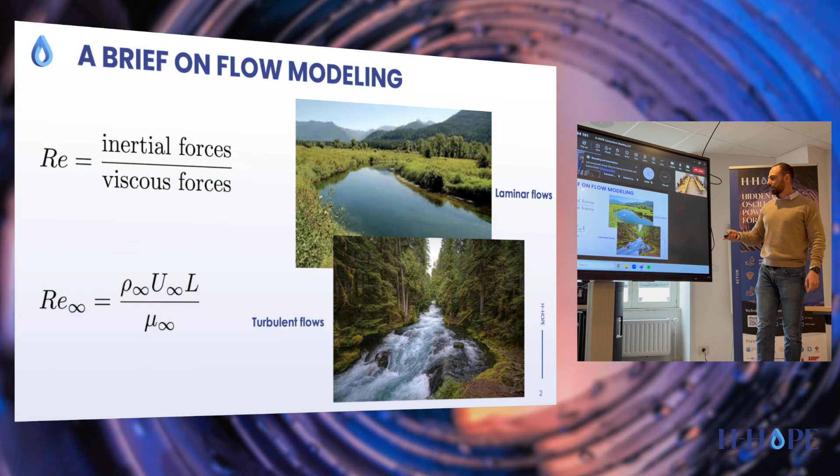So what characterizes laminar flow? Laminar flows are characterized by the symmetry of their fields. If we look at the fluid mechanics around a circular cylinder, an application very close to the intention of our topic, we see that a laminar flow is completely symmetric.

If you look at the value of the Reynolds number, we have very low Reynolds numbers: 10, 20, 40, 70. While increasing the Reynolds number, you see the flow tends to lose its symmetric behavior. At very low Reynolds number, the flow is very smooth and very regular, but while increasing the Reynolds number, the flow starts to become chaotic.

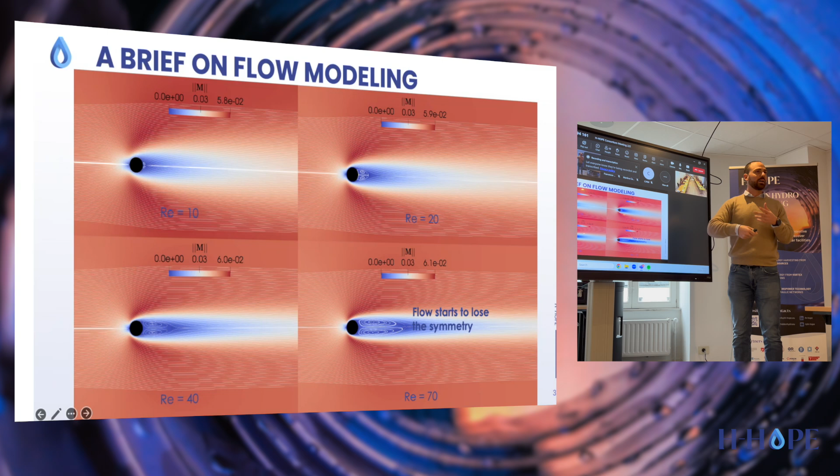That's what happens in case of high Reynolds number flows. The same cylinder, the same flow, still water for instance, but as you increase the Reynolds number, the flow behind the cylinder starts to become chaotic, full of turbulent structures, especially increasing the value of Reynolds number up to values consistent with applications in engineering.

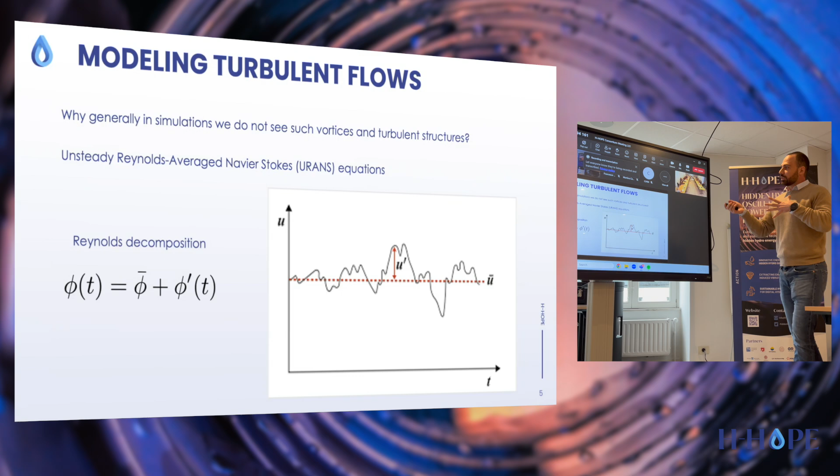But the problem is, why in simulation you don't usually see such complex behaviors or such complex vortices and turbulent structures inside the flow? If you look at the simulations me and Giovanna performed during the first part of the project, all the simulations look very smooth, the flow looks very regular, and there are no structures like this one. So it seems why you are not replicating such complex dynamics.

The reason is that replicating a dynamic like this is extremely complex because all such structures, all these vortices, could be even micrometrical in size. So you need to have a very high resolution in terms of your numerical model in order to capture such complex dynamics.

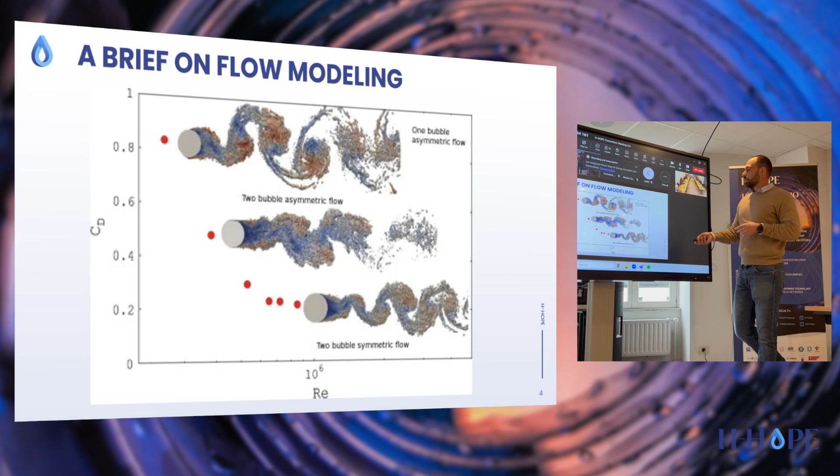So engineers have introduced what is called Reynolds decomposition. You can think that your flow is composed of an average value. For instance, the velocity of your flow is composed of an average value: you average the velocity field through time, and you get the average velocity of your flow.

The real velocity is this average value plus a fluctuation that's time dependent. But in an engineering application, you don't need to know exactly what that fluctuation is, because you are not interested in general in fluctuation values, for instance, of forces, of pressure, and so on.

You are mostly interested in the mean value related to your flow. And that's why you introduce the so-called Reynolds-Averaged Navier-Stokes problem. So instead of solving the entire dynamics of the flow, you just solve the average dynamics of the flow. That is what you are interested in, what you are looking for.

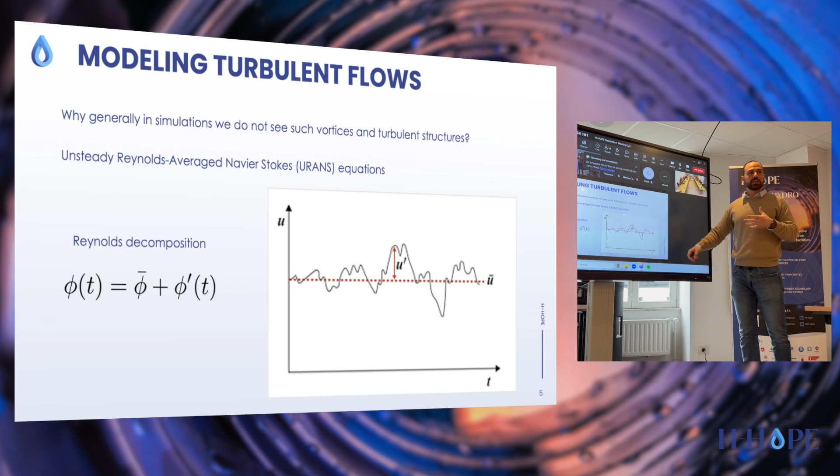I don't want to enter too much into detail, but if you apply the Reynolds-Average decomposition to the Navier-Stokes equations, which are the equations behind fluid mechanics, you obtain unknown terms called turbulent stresses. Turbulent stresses are what distinguishes the whole complex dynamics related to a flow with respect to the average field.

So instead of looking at the whole complex dynamics, you include an additional term that freezes all the complex dynamics you have and allows you to compute just the average field. But of course, turbulent stresses are unknown, and it's a very big issue to model this term.

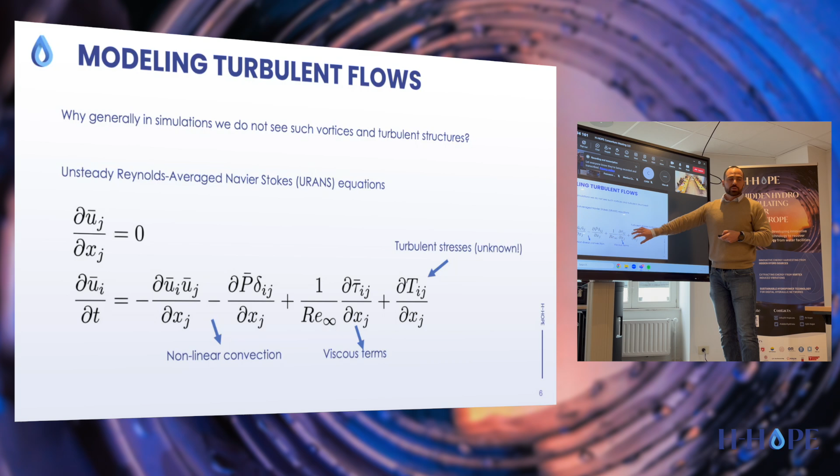And people tend to model it via a lot of hypotheses. In particular, they suppose that all the turbulent structures inside a flow are isotropic, homogeneous, and so on, introducing what is called turbulent viscosity, a parameter that must be modeled in some way.

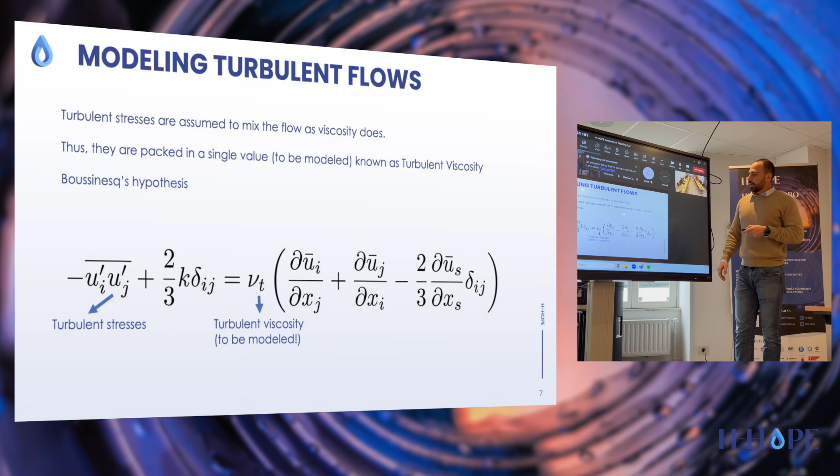And that's why models of turbulent viscosity are so complex. The hypotheses needed to reach the solution of the average dynamics of a flow are very important and very complex. That's why, from the complex dynamics you see in a real turbulent flow, you can obtain the solution of the average dynamics, which is of course affected by all such hypotheses.

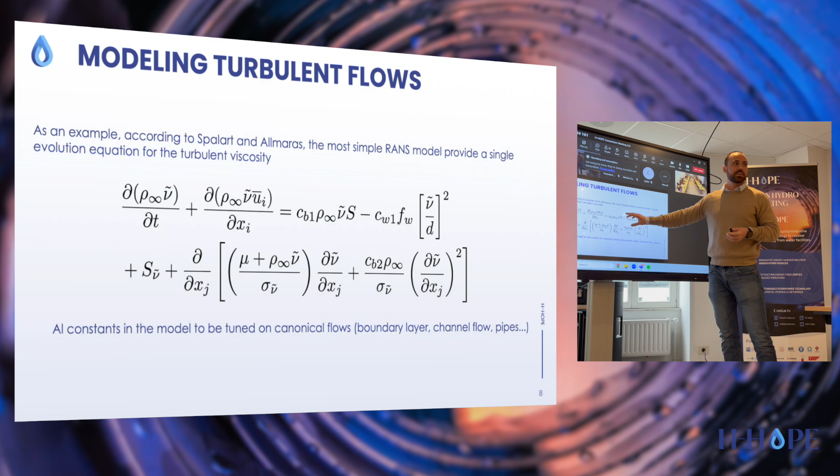Okay, what is the price of this? From an energy perspective, if we decompose the flow energy as a function of the frequency associated with each turbulent structure, we obtain a graph that looks like this.

Associated with the lower frequencies, the ones that are interesting in engineering, you have the major energy content of your flow. So for instance, in the application we have in mind, if we solve the average field, we can obtain the average energy of the flow, which is also the major content in terms of energy of that flow.

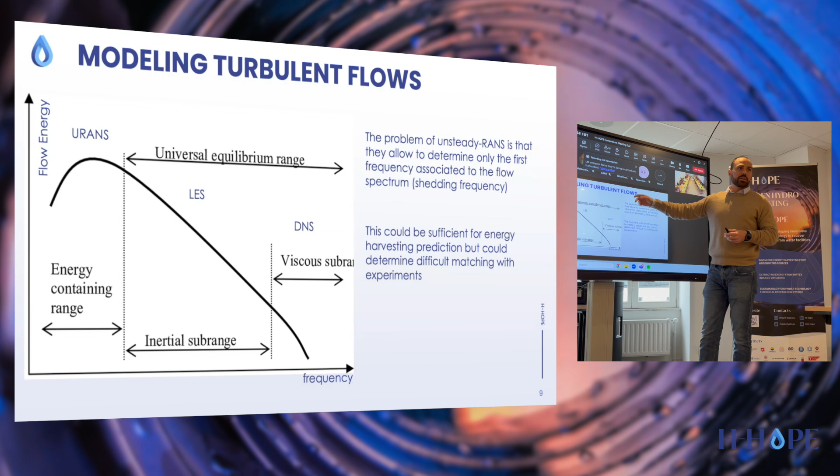But we lose a lot of information, because instead of solving the entire dynamics of the flow, we model all the rest. So high frequency dynamics is completely missed. And of course, if you want to compute this, you cannot rely on Reynolds-Averaged Navier-Stokes equations, but you need to rely on higher order and more complex modeling.

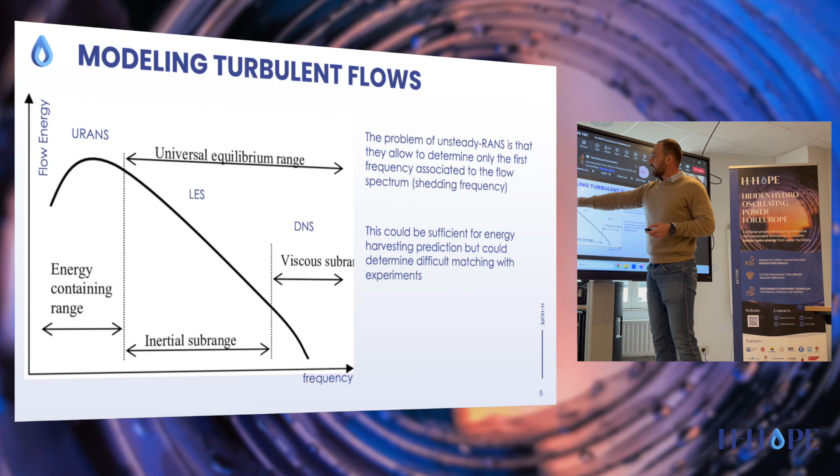But that's not the case for this project, because we intend to harvest the major part of the flow, and so a Reynolds average approach could be sufficient for our purposes.

Coming back to the Reynolds number, what's its role in our case? If we increase the Reynolds number, we discover that the flow becomes more and more turbulent. But the role of the Reynolds number starts to become trivial while increasing this parameter.

If we look, for instance, at the drag coefficient over a cylinder, this value starts to become constant as a function of the Reynolds number. So the Reynolds number, at a certain point in an application, is no longer playing any role while increasing it.

And fortunately, this is the range of interest for vortex-induced vibration applications, because in pilot site applications, in engineering applications, the Reynolds number of the flow is very high, so you lose the dependency on the Reynolds number while approaching higher Reynolds values.

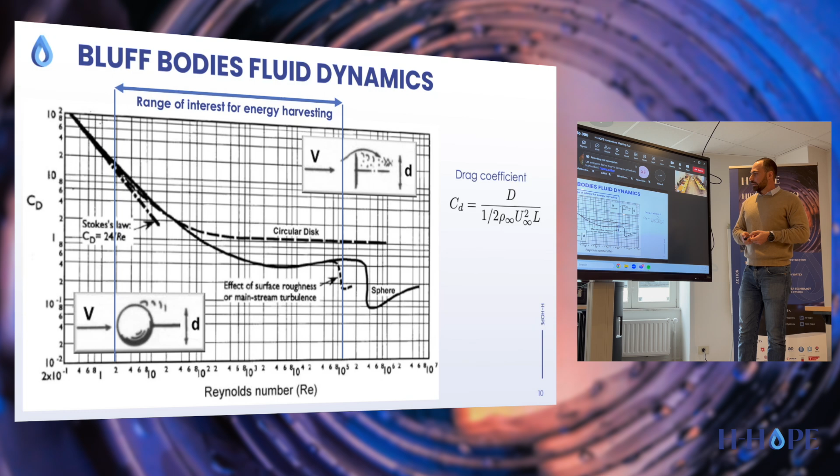And that is a good point for modeling applications, because you can consider your flow fully turbulent, fully independent from the Reynolds regime, and in a certain way this is a very good point for modeling and numerical modeling of such kinds of applications.

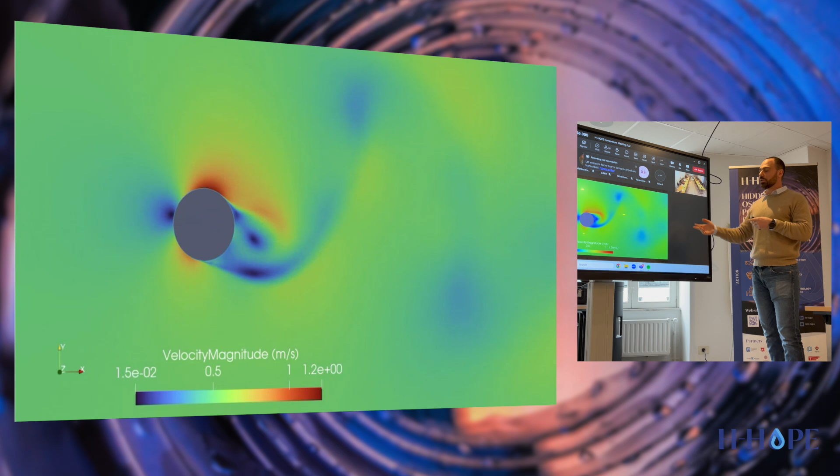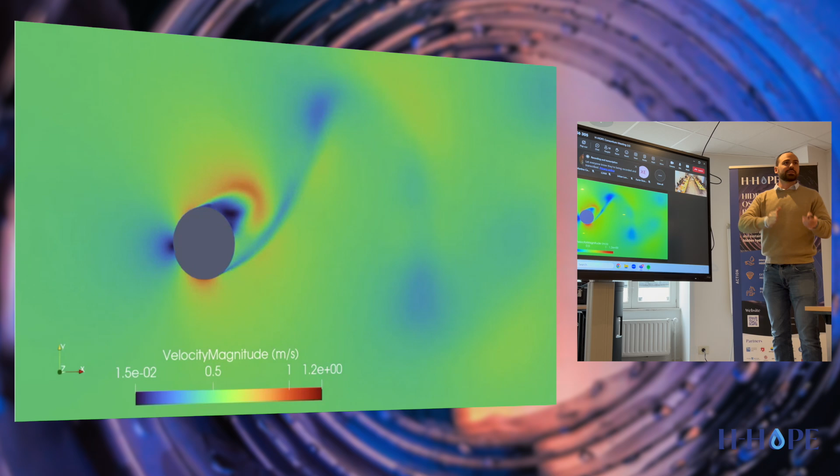So that is a result in terms of average fields around an oscillating bluff body. If you look at this field, it's very smooth. It looks like a laminar flow, but it's not, because this is actually a turbulent flow where turbulence is modeled in some way. But because the Reynolds number of the flow is so high, and because of all the hypotheses we set, the macroscopic dynamic of the flow pertaining such a system has been caught quite accurately. Of course, you miss all the high frequency related to such flow. That is not a problem because in our application, we are not intending to harvest the high frequency, but we are intending to harvest the low frequency dynamics of such a model.

Okay, moving to bluff bodies. After this brief introduction about general aspects in flow modeling, we observe that Reynolds number plays a crucial role in numerical modeling and application of fluid dynamics around objects, for instance. But we also found that the parameter pertaining to a certain configuration becomes independent of the Reynolds number while approaching higher Reynolds number. So what are the parameters that are important in the case of a moving bluff body? A body is not like this one.

So if we look, for instance, at the frequency of the oscillation, we see that increasing the frequency with respect to a reference one, at a certain moment, we change the trend of the aerodynamical parameter around the bluff body. After a certain point, a linear trend or a parabolic one, for instance for the lift coefficient, is broken. So at a certain point, something happens. But we discussed that the Reynolds number is not playing a crucial role. So something else should be included into the dynamic of such devices.

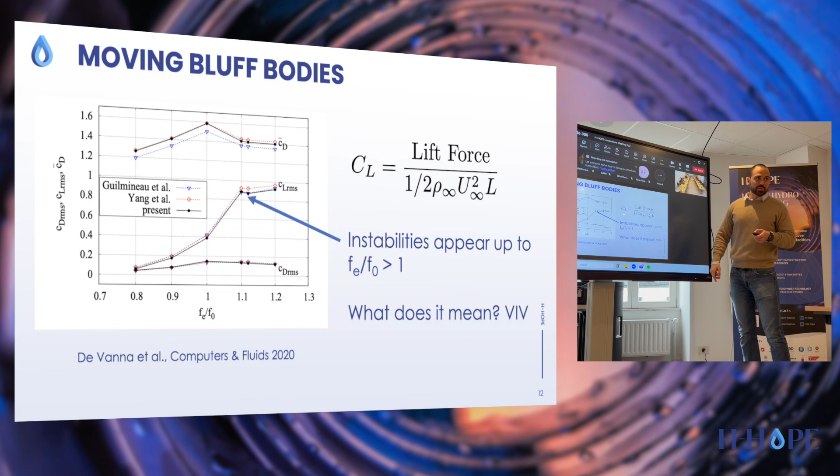And this is vortex-induced vibration and what is called lock-in condition. So let me stress your attention about these parameters.

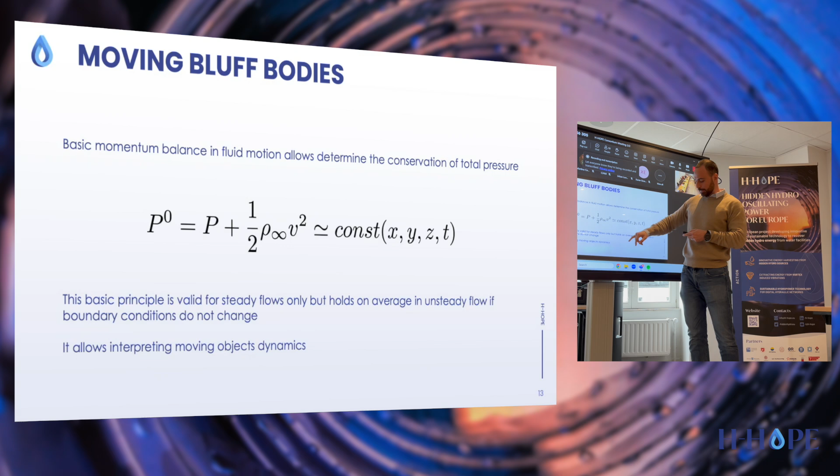Inside the vortex, there's the minimum value of pressure. But because the position of the vortex is changing during the movement of the cylinder, this means that the pressure around the surface is changing while the cylinder is moving up and down. So if you think of the case where the vortex is very near to the surface, the pressure there is minimum.

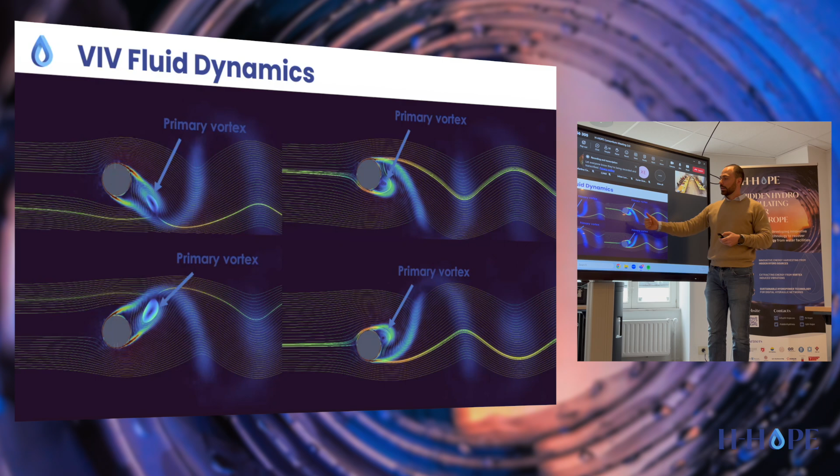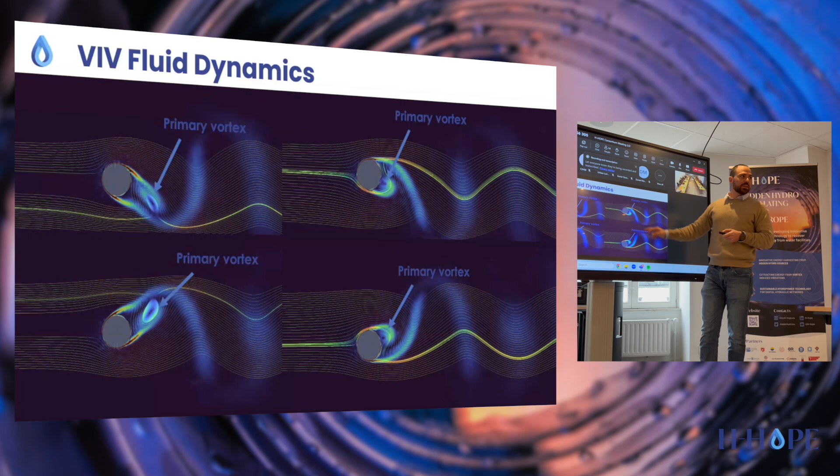The cylinder experiences forces in the direction that follows the minimal pressure. So when the vortex is set in this location, a net force appears from up to down. In the other case, when the vortex is set in the top right position, for instance, a net force appears from bottom to up. That is the engine that moves the cylinder up and down in vortex-induced vibration. So the position of the vortex behind the cylinder is what is pushing it up and down in its mechanics.

So how do we model it? In order to model such a framework, we can consider the cylinder as a concentrated mass. This could look like a clock to some of you, but it's not. You can consider the cylinder as a concentrated mass, linked to a stable floor in some sense, and linked to that floor with a stiffness. So there is a force that tends to stop the movement while the cylinder is going up and down.

You can consider a stiffness inside the movement, and some dissipation because of viscous forces and so on. The mechanical system where the device is installed has some internal dissipation. All such dynamics—the inertial forces related to the cylinder, plus the dissipative forces related to its dynamics, plus the elastic forces—are equivalent instant by instant to the fluid dynamic forces acting on the cylinder surface. These fluid dynamic forces have to be determined via experiment or CFD calculations.

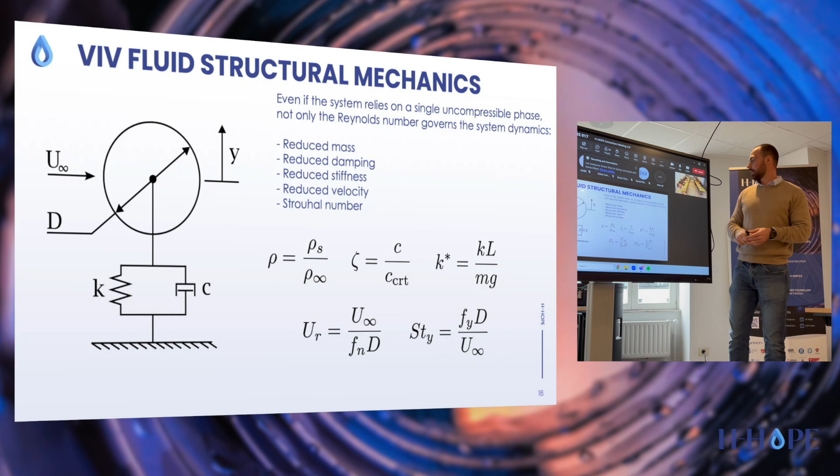If I perturb this table, it has its own natural frequency because it starts oscillating with its own frequency. Instead, Fy is the frequency related to the body movement, so it's something that could be present even in a forced environment. If I force this table to move in a certain way, it starts to move with a frequency that is the one associated with the force I'm applying to it.

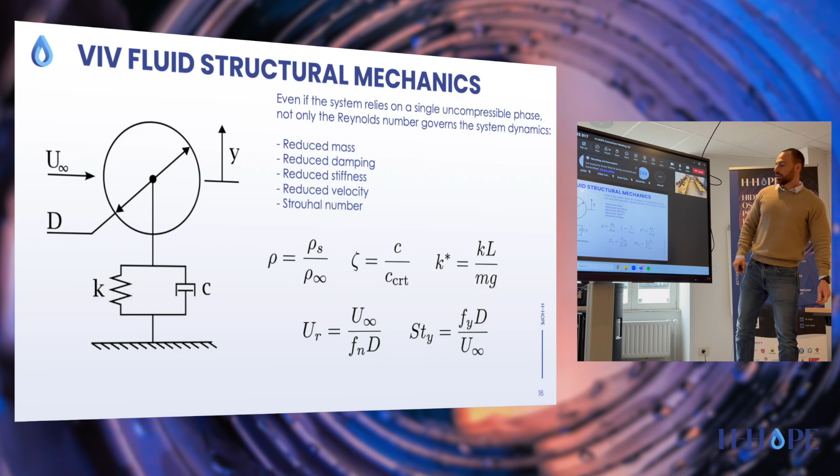So these two parameters are completely different from a physical point of view, but they are both time scales. You can compare the time scale associated to the inherent characteristics of the body, so the frequency associated with its natural characteristics, with the time scale of the flow. And you can compare the frequency related to the body movement, again, with the time scale of the flow. This gives you two very important parameters in vortex-induced vibration: the reduced velocity and the Strouhal number associated to the body motion.

So when a system like that is able to produce energy at the end, it's able to produce energy only when the frequency associated to the body motion is equal to the frequency of the system in its intimate characteristics. In a non-dimensional path, when the Strouhal number associated to the body motion is equivalent more or less to the inverse of the reduced velocity, that means these two frequencies become the same number.

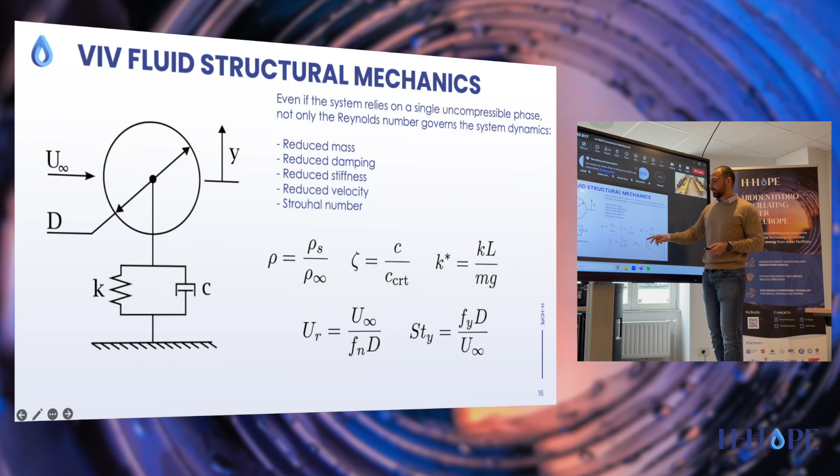And we measure this in a virtual environment because we plot the Strouhal number as a function of the reduced velocity. This is a branch of a hyperbola in a mathematical sense. We see that all simulations collapse to this branch of the hyperbola in a certain range of reduced velocity. Outside of this range, something else appears.

So instead of following such a dynamics, the Strouhal number associated to the body motion follows the Strouhal number associated to the vortex shedding. The vortex shedding has its own Strouhal number, that is something specifically related to the geometry.

If you have a cylinder, you have a specific Strouhal number for the vortex shedding. If you have a square, you have another number, and so on. So if you look at the Strouhal number outside this specific range, the Strouhal number associated to the body motion collapses to a Strouhal number associated to the vortex shedding.

So you are outside of the lock-in state. And this value, the value of the Strouhal number associated to the vortex shedding, mildly depends on the Reynolds number.

So in case of higher Reynolds number, in case of higher reduced velocity in some sense, you see that the Strouhal number associated to the body motion is the same number for every configuration, because the Reynolds number is not playing a role anymore.

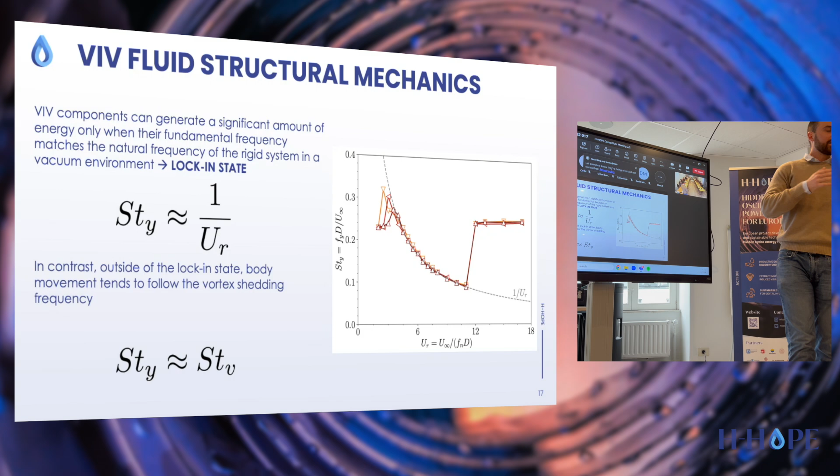If you look at a lower reduced velocity scenario instead, you see there is a mild dependence on the Strouhal number associated to the body motion with respect to the reduced velocity, because the Reynolds number is playing some role. The flow, in some sense, below a certain value of reduced velocity, is in a transitional state. So it's neither laminar nor turbulent.

What is very interesting of this dynamic is that this dynamic is very regular. So you can tune your clock with this dynamic, because the frequency associated to the body motion in a lock-in state is very confined to a precise frequency. In fact, if you compute the Fourier transform of the vertical displacement of the cylinder, you obtain a very confined frequency associated to each body motion.

So you can easily model the body motion as a single harmonic function, a monochromatic approximation. The body motion can be easily modeled as a function y in terms of time, equal to an amplitude times the sine of 2 pi fn times t. So you have a very straightforward approximation of the body motion in a vortex-induced vibration device, because the frequency associated to the body motion has a unique harmonic.

But what's the problem of this scenario? The problem of this scenario is this formula: frequency is the inverse of time. And I want to stress your attention about this, because in order to catch low frequency, you need to catch a very long time window.

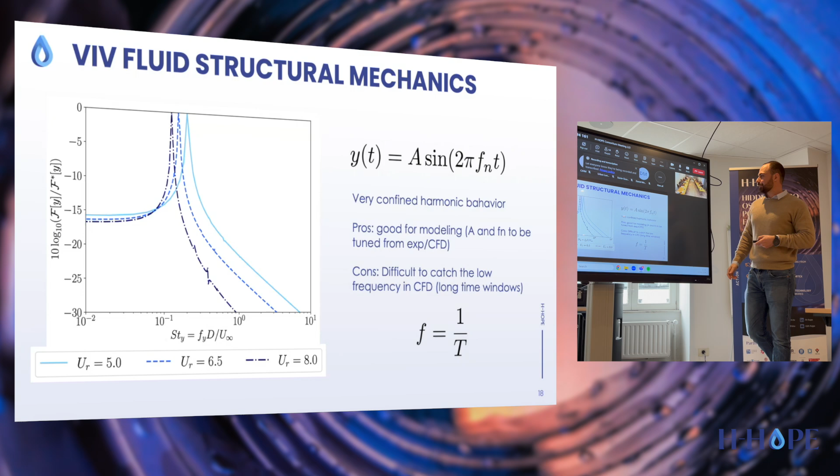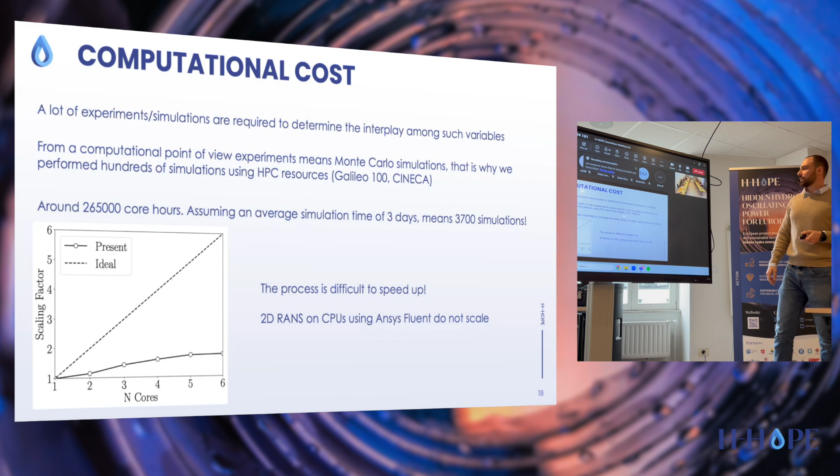Simulations are not very prone in this, because from my experience, in order to tune the database behind the vortex-induced vibration device, you need to make simulations very long. You need to take simulations for days even. In particular, with De Vanna, we perform simulations around 265000 core hours of simulation. That means if every simulation takes more or less 3 days to be completed, we count as 3,700 simulations for this problem.

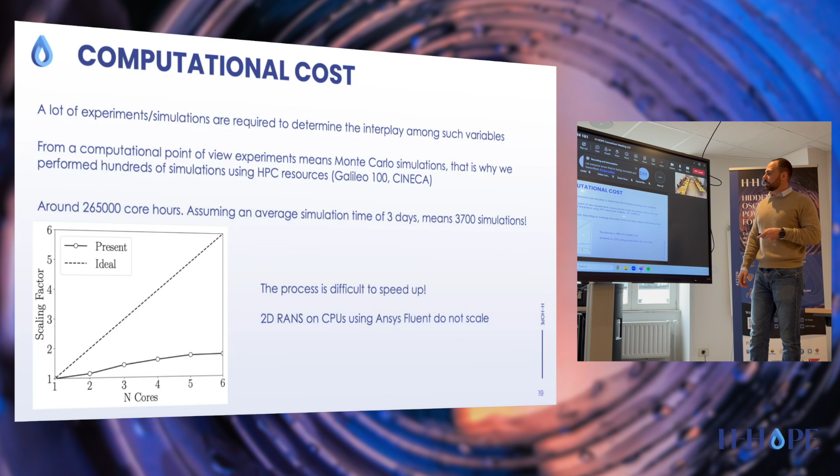Increasing the core count of each simulation is not playing a role, because if we look at the time we require for each simulation, and if we double the computational resources associated with each configuration, there is no speed up in terms of time to solution. So two-dimensional RANS equations are not prone to scale on CPU environments. ANSYS Fluent does not scale very well in such a scenario. I hope that experiments are faster than this.

Now for some results. In order to convey results about vortex-induced vibration, you need to separately study the role of all the parameters related to such dynamics. In order to make results as general as possible, you need to make parameter studies. You need to perform simulations, and fill the database in a non-dimensional way.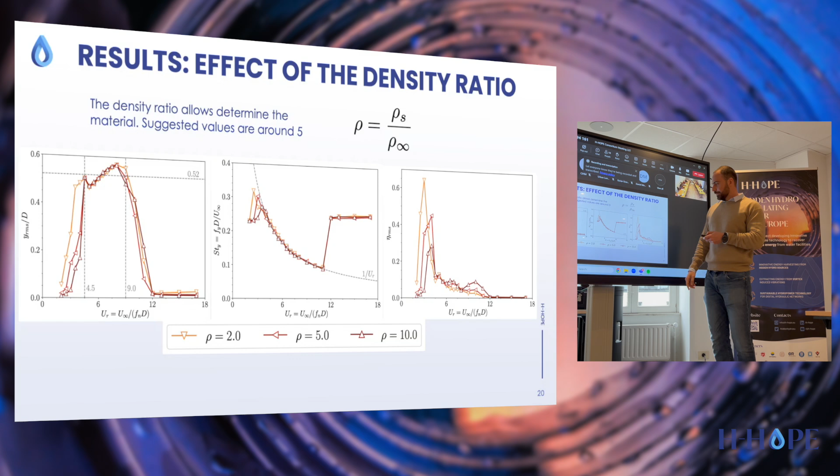If you tune the stiffness and you plot the displacement as a function of the Reynolds number, you see that curves move from left to right, more or less in a solid way. There is a shift of the curve as a function of the reduced stiffness. So you can tune the stiffness of your system as a function of the Reynolds number of your flow, in order to catch the stiffness you need to maximize the amplitude of the device as a function of the Reynolds number of the flow you have.

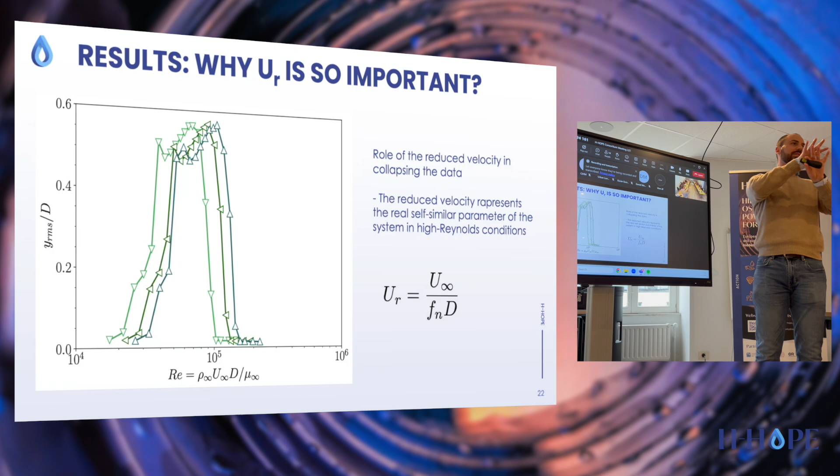These results have another important implication. When we plot the root mean square of the displacement as a function of the Reynolds number, we saw that the results are not collapsed over the same curve, which is what happened instead plotting the same results as a function of the reduced velocity. So reduced velocity in such a scenario, in such a device, plays a very important role because it's the intimate self-similar parameter that governs this dynamics. If you plot everything as a function of the reduced velocity, everything collapses to a single non-dimensional ideal device. And this is a very good property of this parameter.

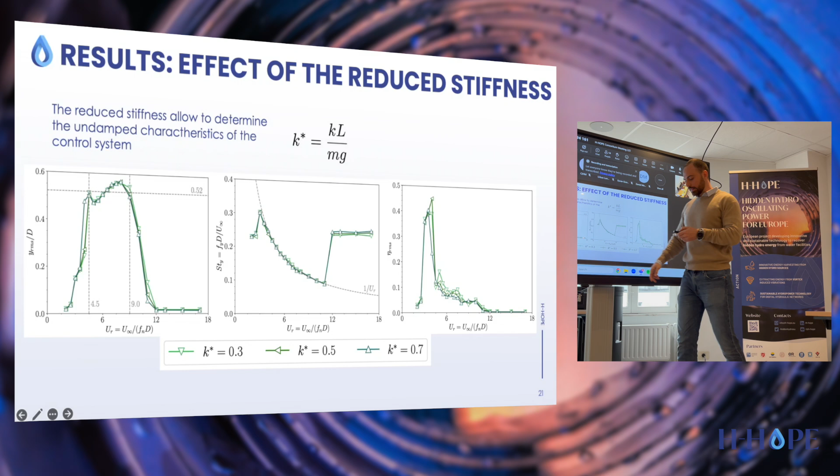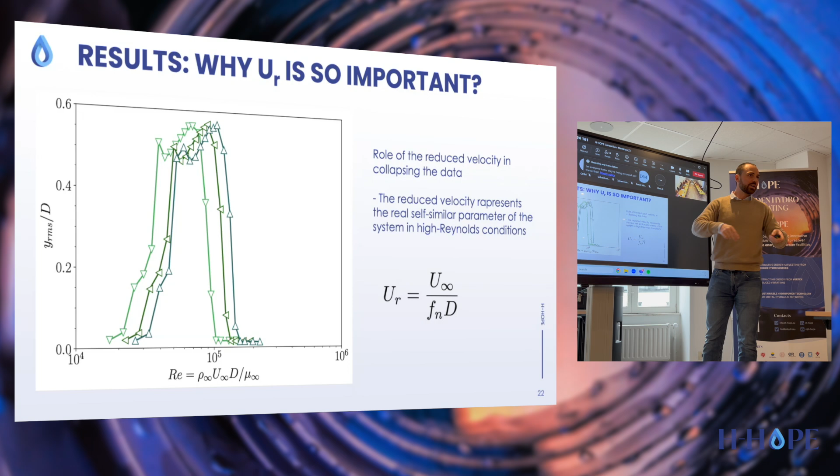Not only for such results, but in general for the inverse transformation, because if from a modeling perspective you are interested in collapsing the curve, and from an applicative perspective you are interested in the inverse application, so taking the collapsed curve over a realistic scenario. So inserting your boundary condition, your flow velocity, your cylinder diameter, and so on, and taking this value of reduced velocity in an opposite sense. So from all the collapsed curve, obtain your specific device.

Damping ratio is associated to dissipative characteristics, and in particular, all the system has their own dissipation side. So you can model dissipation as a physical dissipation ratio over the critical dissipation that is an inherent property of a system. So it depends on its mass and its stiffness.

And this is a very crucial result for our application, because dissipative forces are inherent in our application, associated with the generator, as Marco will say after I think. So a generator, because of its resistive characteristics, poses some dissipative forces inside the system. So we need to tune very carefully such a parameter in terms of the whole system, because if we move to too high a damping ratio, the lock-in state disappears.

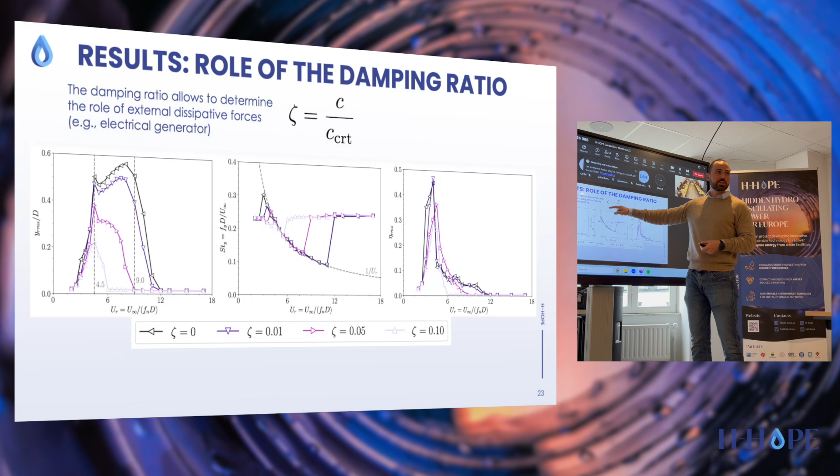Aside from some scattering related to simulation and the uncertainty related to CFD, all the results collapse on the same curve. So you have a map in order to tune your device that is fully non-dimensional.

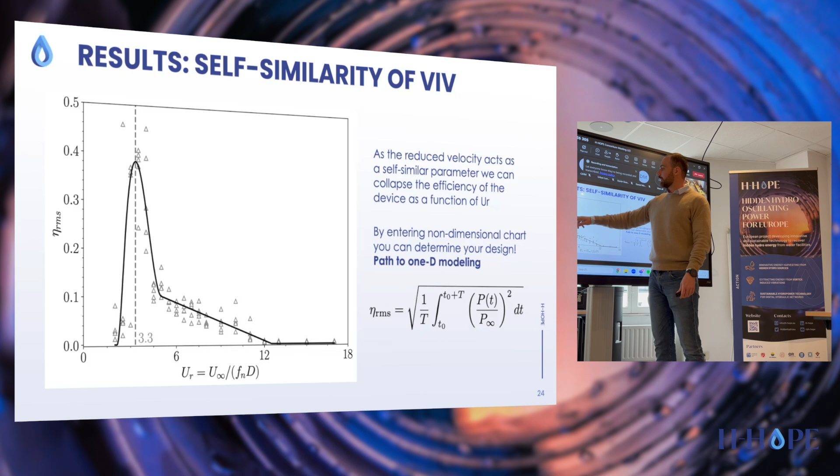And from this map, if you know the characteristics of the incoming flow related to your device, you can multiply the power associated with the flow you have with the root mean square of the efficiency at the specific reduced velocity you intend to design your device for. And so you can compute directly from such a map the power extracted by the device.

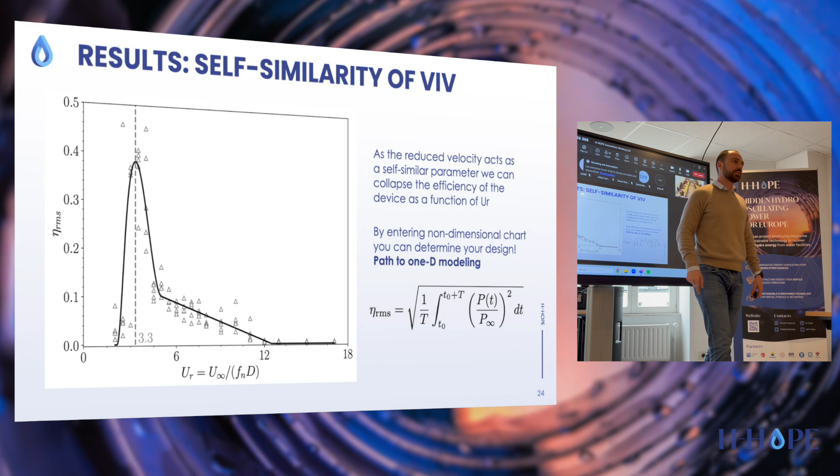So, to conclude, vortex-induced vibration represents a viable alternative to recover energy from water sources that are difficult to exploit in a different way.

Theory is lacking simple models, and in order to determine a simple model, I think you need to think in this way: you need to think in a non-dimensional way in order to collapse all the results over a single curve. And then if you want to design a specific device, you take the curve and take the inverse transformation in order to get your specific design.

Vortex-induced vibration, even being something related to a single phase flow, so in principle something regulated only by the Reynolds number, because of the introduction of the movement of the body with respect to the flow and so on, depends on many other non-dimensional parameters: the density ratio, the reduced stiffness, and so on. So this number is huge, and in order to determine the role of each parameter, you need to perform a lot of simulations or experiments. But fortunately, some self-similar properties connect all such parameters to each other, and this is a very good property of this system that makes vortex-induced vibration feasible in terms of its design.